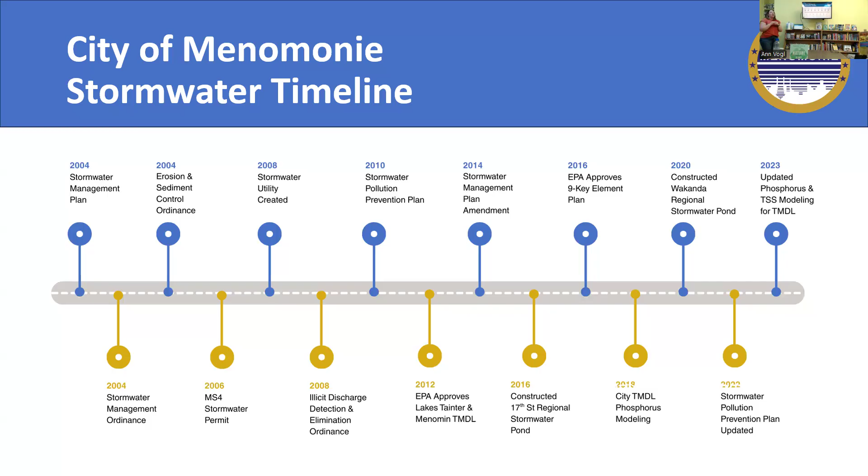Residents pay based on a flat rate, which right now is $12.50 per quarter per household. Businesses and industrial uses, schools, etc., pay a rate based on the amount of impervious area—the area of hard surfaces, like their building footprint, parking lots, etc. They pay a rate based on the amount of impervious surface they have.

So I'm going to whip through some of these minimum control measures and the things we do to fulfill those measures and track. Education is a big one—there are a number of different topics we have to educate on. So we do things like this tonight, and a lot with the school district and different kids and field days, kinds of things.

One of the things we also do is collaborate with other municipalities who have the same permit. So Rain to Rivers is a group of MS4 permitted communities in western Wisconsin all working together to do education and outreach for stormwater. We pay dues as a member municipality, meet monthly, and do larger education projects—like signage at different ball fields, radio ads, TV ads—things each individual municipality would have a hard time funding or having the resources to do.

We also put on workshops and are at community events and things like that. We also have a mini grant program—if you work for a government or a nonprofit, we do $1,000 mini grants to do rain gardens or different stormwater water quality projects. That's something we like to fund, and we love to see the different projects that groups come up with. It's also just a great peer network for idea sharing—hey, I got this problem, how do you handle this? Just trying to not reinvent the wheel.

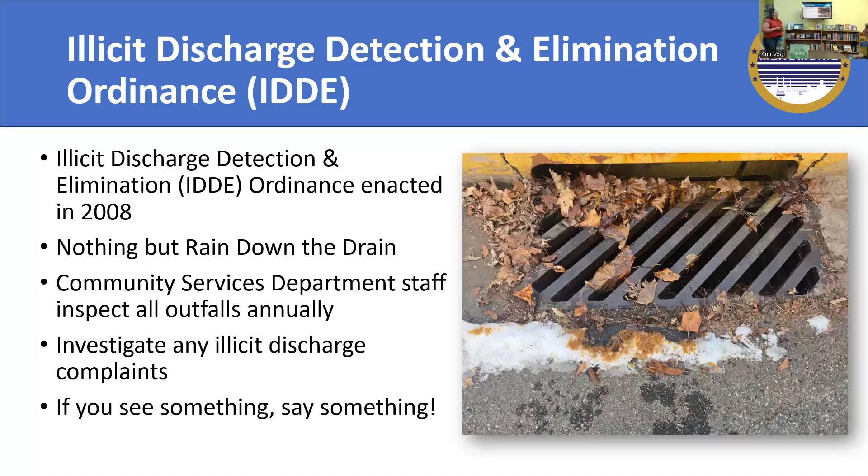They go there at least 48 hours after a precipitation event, because we want to make sure it's dry, that nothing should be running, and then we take pictures.

In addition to the IDDE screening, we're looking for maintenance concerns as well, if there's erosion, if the pipe is starting to erode, if the pipe has fallen off. We have some where the end of the pipe has fallen down or things like that. So we look at maintenance concerns every year just to make sure everything is going okay.

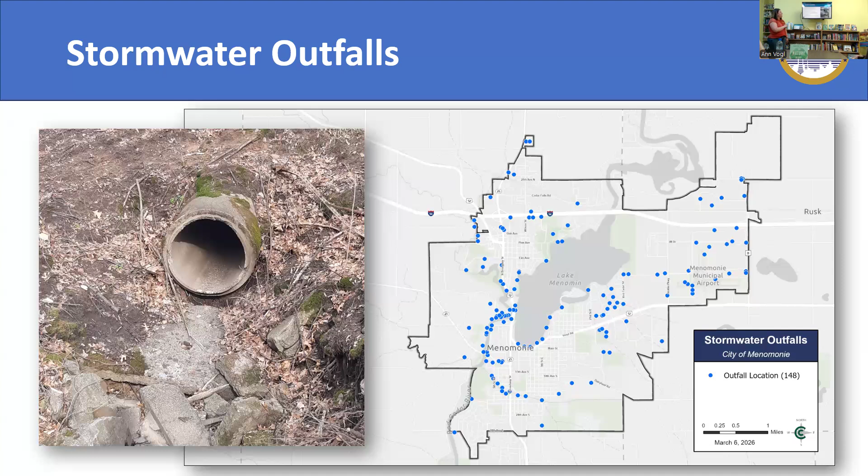This is a time-consuming thing to go to 148 places, and they are not necessarily in the most accessible spots. It's down lots of hills and steep banks and things like that, and it almost always happens in late fall, after it's too cold to do road work, so it sometimes is a little bit dicey for our street staff.

But I think it really highlights that water quality work isn't just me in the city. It's our street department, our building inspection department, our city engineers. It's a real collaborative effort to get all this work done, and we're really willing to help each other out to get it done.

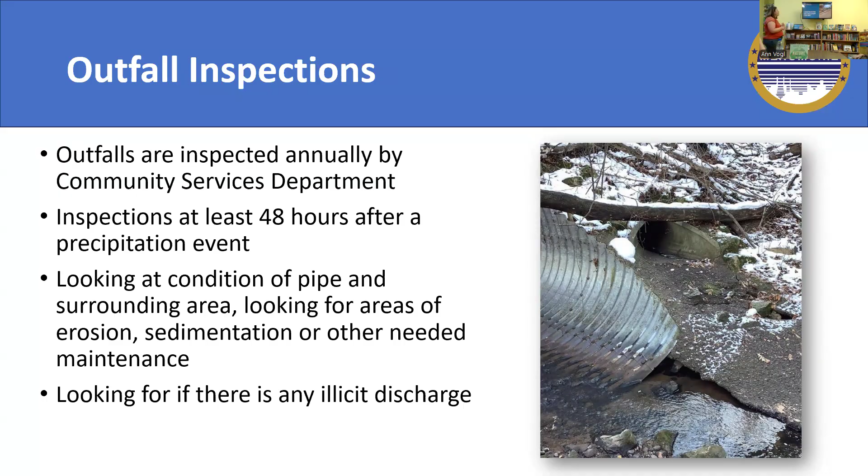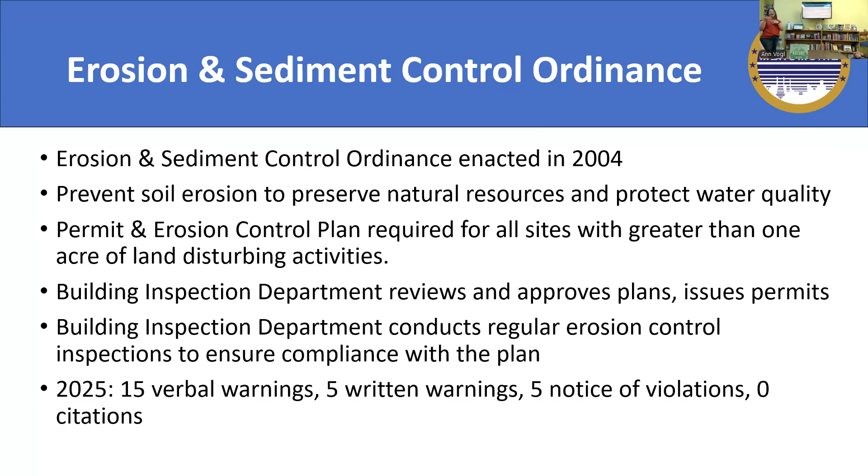Construction site pollutant control is another thing other people help me do. Our building inspector handles this part of the program. We have an ordinance from 2004 that focuses on construction sites and the measures they have to take to make sure soil and water stay on their site during that process. They have to give us plans for how they're going to do that, and then we can enforce those plans. So here are a couple of examples.

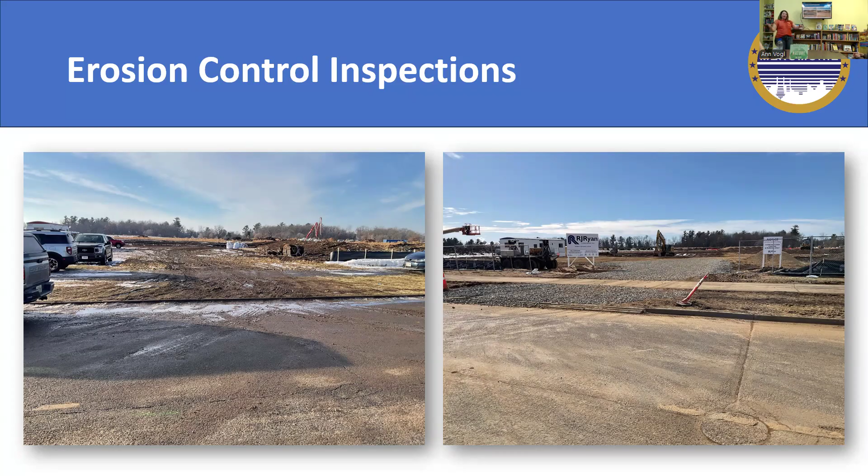What we do want—so we gave them a warning and a violation—and on the right, they put in tracking rocks. These are basically big rocks so that as trucks drive over them, the mud and dirt flops off into the rocks instead of onto our streets.

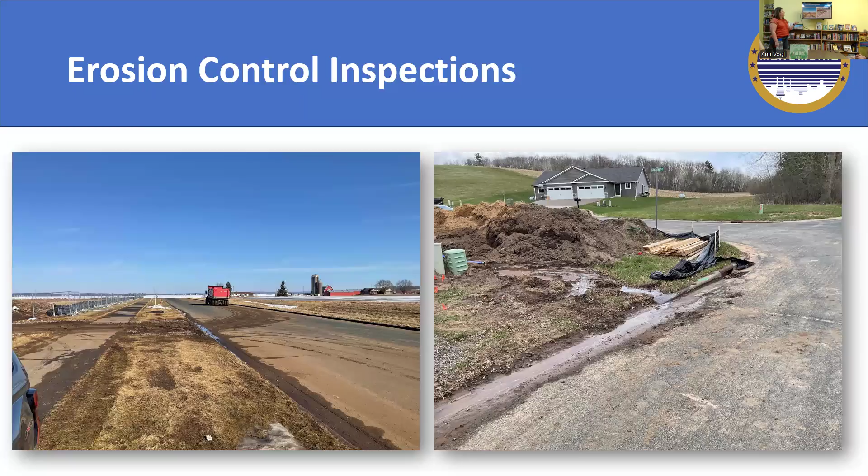Post-construction stormwater management covers our stormwater ponds, swales, and things of that nature. This applies when construction is going to happen in the city—developers have to give us a plan that tells us a lot of different things.

It tells us how water flows on the site before they do anything, and how water will flow after they build. It shows how they'll reduce stormwater runoff, both sediment and phosphorus, to meet our city ordinances and state statutes, and what the design of the practice will be—whether it's a dry pond, a wet pond, or a swale.

They have to sign a maintenance and monitoring agreement, which is basically saying in perpetuity they have to maintain the function of these stormwater ponds for every owner till the end of time. So that's recorded with the Register of Deeds.

Some of the common stormwater practices that we see are wet ponds. That's a pond that is going to hold water all the time, and it focuses on getting sediment and things to settle out. Infiltration basins are a dry pond, so there's no water in them unless it has rained, and then it's letting that water slowly infiltrate into the soil.

Rain gardens and bioinfiltration basins are the ones that have flowers inside of them, and then vegetated swales are just kind of the dips in the grass that are typically still mowed with turf grass. They're just kind of providing the conduit to get water to a certain place.

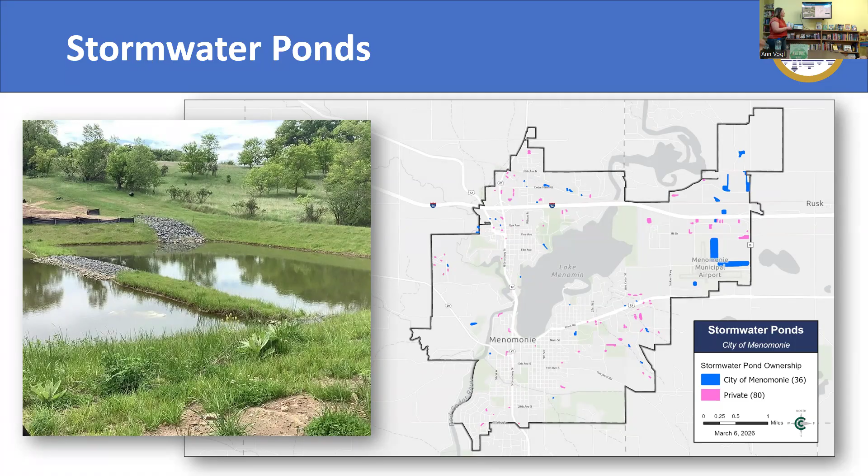So pond inspections for our 36 publicly owned ponds, those have to be inspected annually. I go out and do those in conjunction with our streets foreman, because the streets department is the one who would be doing any maintenance on it. So we do that together.

And then privately owned ponds, I inspect at least once every 5 years. My goal is to do every 3, but for sure once in our permit term. I do privately owned ponds, and then if there's maintenance that needs to be there, I'm working with that property owner to get that work done.

Things that we're looking at there, we're looking at the condition of the structures, so the inlet pipe, the outlet pipe, access to the pond, can you get to the pond if you needed to do maintenance. If there's any erosion, if there's any woody vegetation, so you don't really want trees or shrubs or things of that nature on the slopes of the pond.

Those need to get taken out. If there's trash that's there, if there's sediment there that's kind of starting to prevent water from flowing in, they would have to kind of dredge that out, etc. So those are the things that we look at during pond inspections.

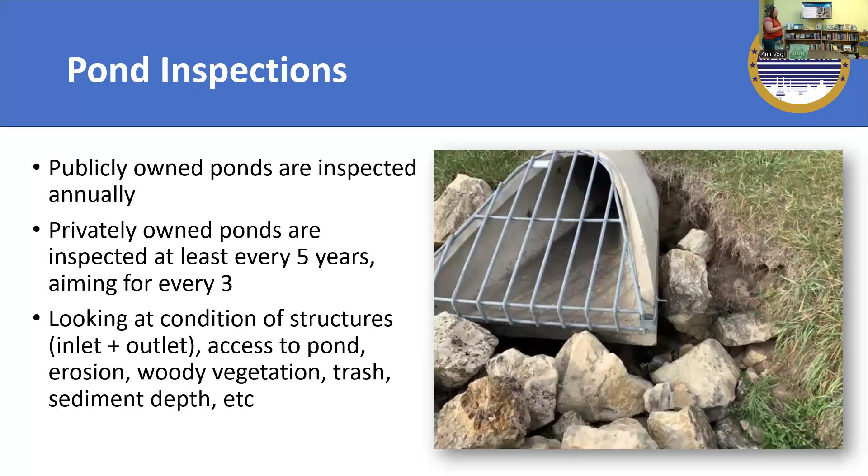This one is the Wakanda Regional Pond, which is up in Wakanda Park on Beach Road. We cut a pipe that was already existing in North Menomonie, and then it goes into a wet pond, and then through here, there's a series of cells that kind of step their way all the way down to the lake.

It has lots of native plants in it, so this is kind of an example of that bioinfiltration basin. And those weirs then in the rock kind of allow it to flow over and go in through there.

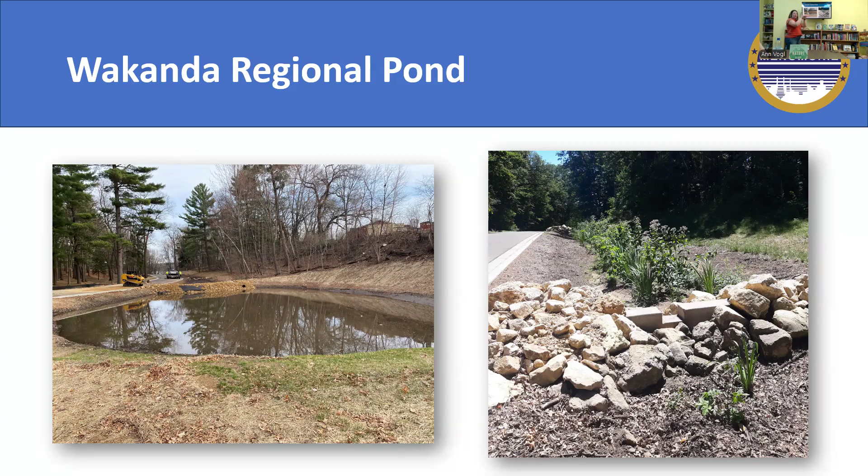So pollution prevention is kind of the catch-all minimum control measure. Things that fall under there are street sweeping. So we have a couple of street sweepers. One is mechanical, so it really is just like it sounds, it's like a broom in your kitchen, but a lot fancier for that. And then there's a vacuum one that has some suction that helps get some of that sand up. Different scenarios work better for different sweepers there.

We typically street sweep between March and November. We do a big push as soon as the snow is kind of done. As of this week, we have at least hit every city street once this spring. So we'll continue doing street sweeping, kind of trying to head back and hit harder hit areas. And we will eventually street sweep all of the trap rock that is out on Broadway. They're starting to spray patch and things like that.

We use street sweeping for sediment, dirt, sand, and more. We collect and pile all of these street sweepings, and then we test them after a certain volume. That's because we have a permit for beneficial reuse from the DNR, called a low hazard exemption, meaning that instead of having to landfill all of this material, we test every 200 yards or so, I'm not 100% certain, and then based on those tests, we screen it.

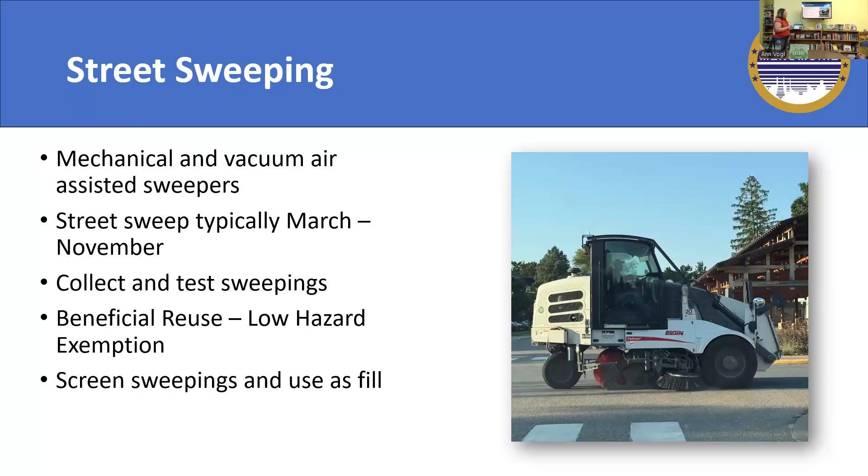Any pop bottles, litter, or things like that get screened out and have to go to the landfill. But then we can use that material for fill in certain spots based on our test results. So that's a huge money saver, being able to have that permit. It's a 5-year permit, and we just sent in to have it re-upped for another 5 years, so we should hopefully know soon if that happens.

Then we do leaf collection, which we are currently in the process of doing in the spring and the fall. We do a couple of days each season where we'll pick yard waste and brush up at the curb. Leaves are a significant source of phosphorus pollution, especially in the fall.

We compost the yard waste that we get at the solid waste site, and once that finished compost is ready, we give it away for free. There's a very large pile at the solid waste site, so if you're in need of compost for your garden, feel free to come and grab that.

And then we follow this up with street sweeping just to make sure we're catching as much of those leaves in that process.

In the last couple of years, we've done some native plants at City Hall. I begged for areas and got one little stretch on the south side and the area by the dumpster enclosure and the electrical things that wasn't really being mowed well anyway. So I was like, hey, I'll take that. Beggars can't be choosers, so it's the prettiest dumpster enclosure area you've ever seen.

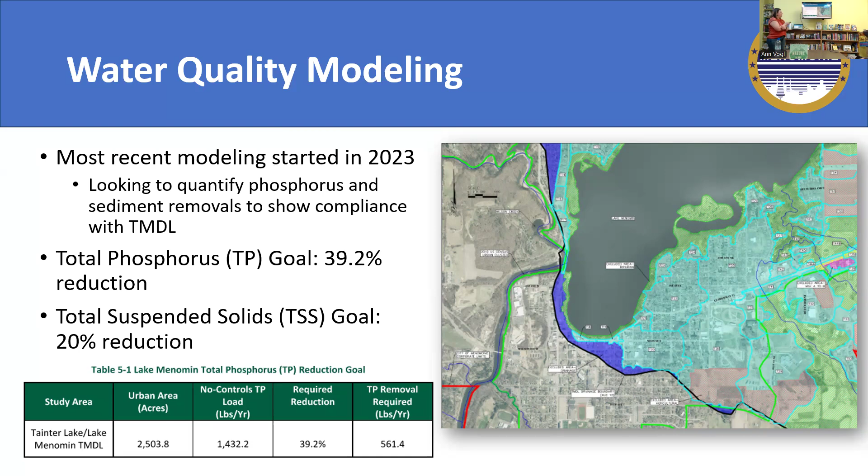In this modeling, we came out at a 50.5% reduction for sediment, or TSS, and a 45.5% reduction for phosphorus, which shows we are in compliance with our permit. We are working with the DNR to get formal concurrence with this. The thing to note here is this model did not include any of our privately owned stormwater ponds - all of those 80 stormwater ponds you saw on the map earlier aren't included in this model.

Street sweeping isn't included in this model. Leaf pickup isn't included in this model. It's a very bare bones model, and we're still meeting our goals for that fairly handily.

So we're waiting now to get concurrence from the DNR and then hoping to be able to move on, because the TMDL is not the entire city. It is only the parts of the city that drain into Lake Menomin. So if you are in parts of the city that would drain into Wilson Creek or below the dam, like the Red Cedar River, those are not considered in the TMDL.

So if I want to do a stormwater practice outside of that, I really want to make sure that we are compliant with the TMDL, that the DNR agrees with that, before we spend money doing additional ponds in other places.

Kind of the next two ponds that are on the list for when that happens are down at our community services area off of Highway 29, and then up in North Menomonie off of like 28th Avenue as you're heading out north on 25 out of town.

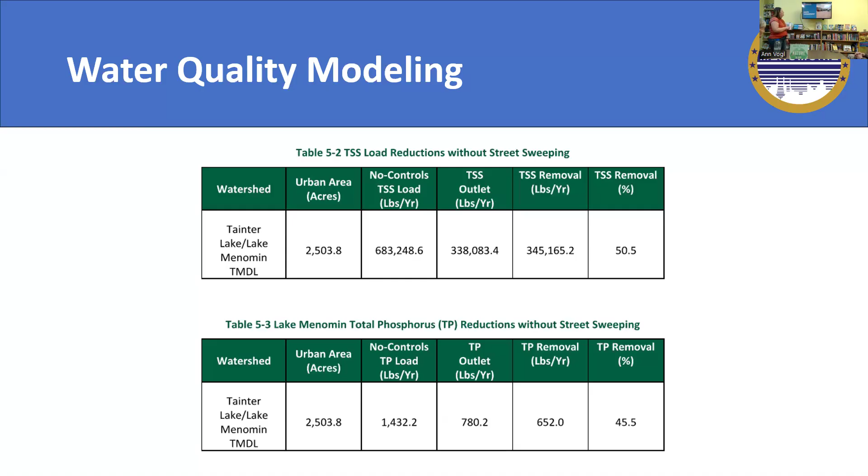So now switching gears away from water and stormwater to waste management. The city has a drop-off site for solid waste and recycling. It's open 3 days a week for city residents, and we take a lot of things at the site. We have what I would consider your regular household trash and recycling, so paper, cardboard, glass, aluminum cans, steel cans, all of that. We also take scrap metal, so basically anything metal we can take.

Used oil and oil filters, furniture and bulky items - there is a charge for that. Carpeting, which also has a charge. Limited amounts of construction waste, like a pickup load or less. No shingles. And then we also take yard waste and brush. We have that free compost and wood chips as well out there.

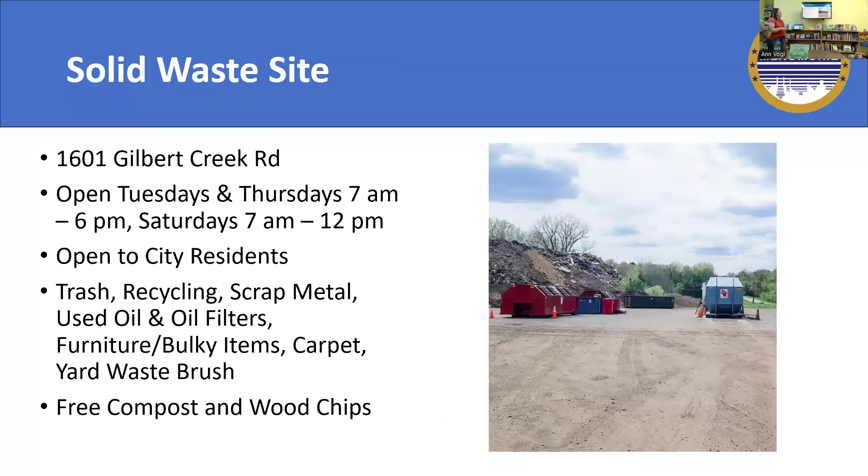We also have curbside recycling. The city pays for curbside recycling for 1 to 4 unit residences, so that's one of the other things you'll see on your quarterly utility bill if you live in the city. We have 2 current haulers for curbside recycling: GFL, which is the old Menomonie disposal, and WM, which is the old advanced disposal. They like to buy each other.

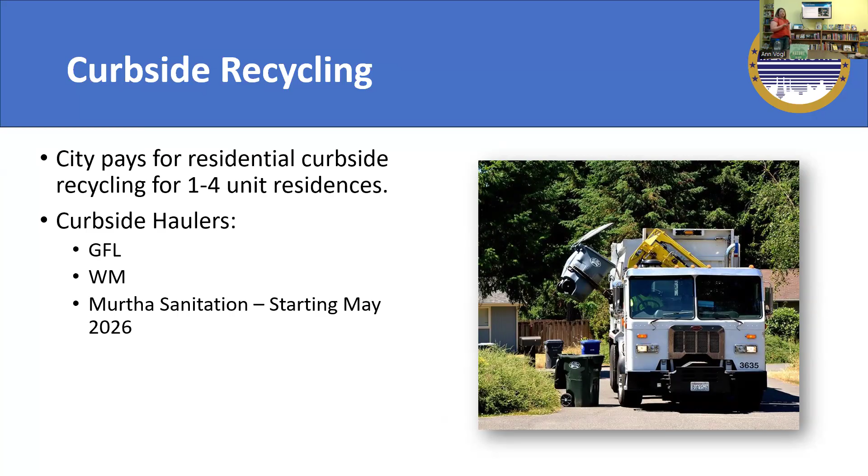And then we also have a new one coming to town, which is really exciting. Murtha Sanitation out of Baldwin is expanding their operations into the city in May. So that's another option for both residential and commercial solid waste recycling in the city.

Urban forestry has been a big focus of the last several years, mostly because of the emerald ash borer and the large amount of ash trees that we had in our city boulevards and our parks, and just in general in private property as well.

It was a very popular tree to plant, particularly after the Dutch elm disease epidemic. They're like, oh, ash is a really great tree that's kind of like an elm, and we planted a lot of them, which didn't work out so well for us.

So we removed in the last probably 5 years over 1,000 ash trees just out of city boulevards and the main areas of parks. The kind of more wild, natural, wooded areas, we have not done any maintenance in there. We're kind of letting nature do its thing there.

But for urban forestry, we do have a city forester position. That's a position within our city streets department. He probably spends about half of his time on forestry related duties and half on streets maintenance, plowing snow, that kind of thing. That may change a little bit as we move away from cutting trees all winter long.

And then we have an urban forestry board, which Liz is the chair of, and Monica is on it as well. So we have that. We meet 11 times a year and work on different policies, procedures, different events, things like that.

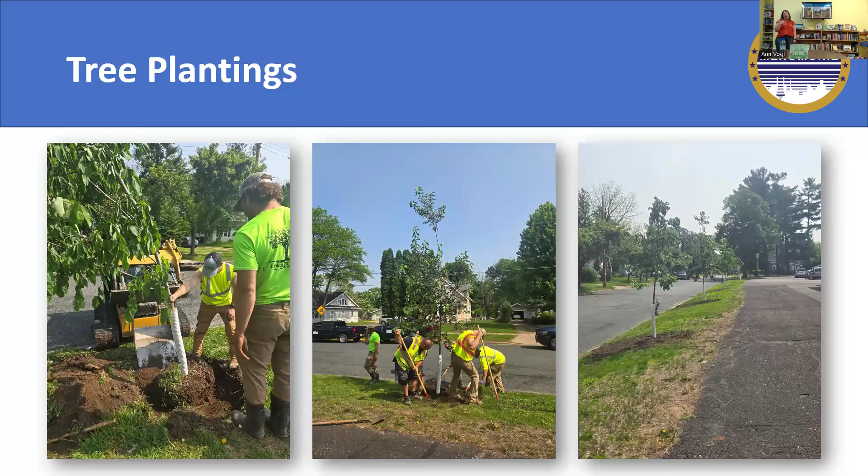So we've done a couple of restoration projects in the city. This is the Galloway Creek Restoration Project on a parcel of land that the city owns over by the high school. It's a couple acre parcel partnered with the Lower Chippewa Invasive Partnerships, working to remove tons of invasive buckthorn, a couple of cork trees, and some honeysuckle. That's some of the work here.

And then a current project that we have with our Urban Forestry Board is kind of a test project in Phelan Park. So at the very south end of the park, there is a tributary of Galloway Creek that is kind of the headwaters of Galloway Creek there, very infested with buckthorn and honeysuckle.

And with Dr. Keith Gilland and his UW Stout students, who just took some chainsaw safety classes, got to practice their skills and removed a ton of invasives over the winter, which looks really awesome. And then the fire department was kind enough to burn it for us. And then I just picked up 300 saplings today that we are going to plant there with different volunteers and groups to try to restore that back to more native trees.

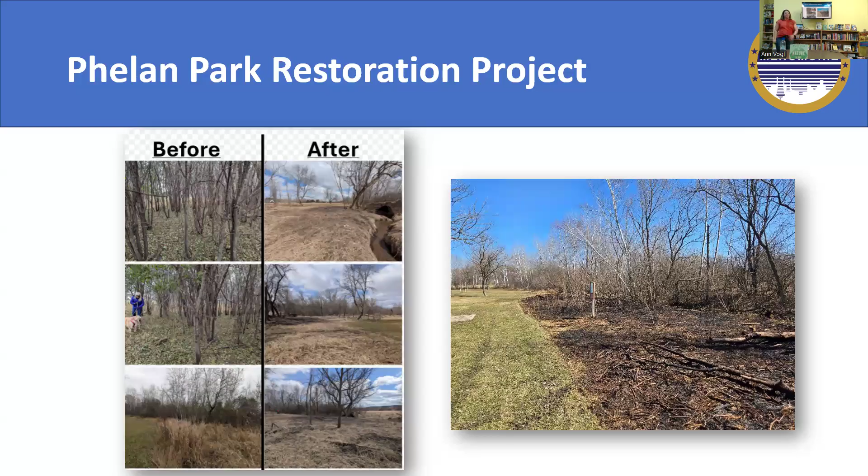So the city has also done a lot in the energy world. In 2020, the city council passed a resolution for the municipal operations and buildings to be carbon-free electricity by 2050. It also established some incremental goals for our carbon reduction, that we would reduce 25% of our carbon footprint by 2030, 60% by 2040, and then be fully carbon neutral by 2050.

So with that resolution and that goal, we knew we needed some help in how do we get there, developing a plan, etc. So we partnered with Xcel Energy and their Partners in Energy program. We were actually the first municipality in Wisconsin to do this program. It was a 2-year program where we formed an energy action team, which was city staff, business leaders, residents, representatives from the school district and Stout, and we met together.

We talked about our goals for Menomonie, our priorities for energy, etc., and that developed an energy action plan. That plan outlined both near, mid, and long-term things to do to kind of enhance energy efficiency, but also renewable energy in the city.

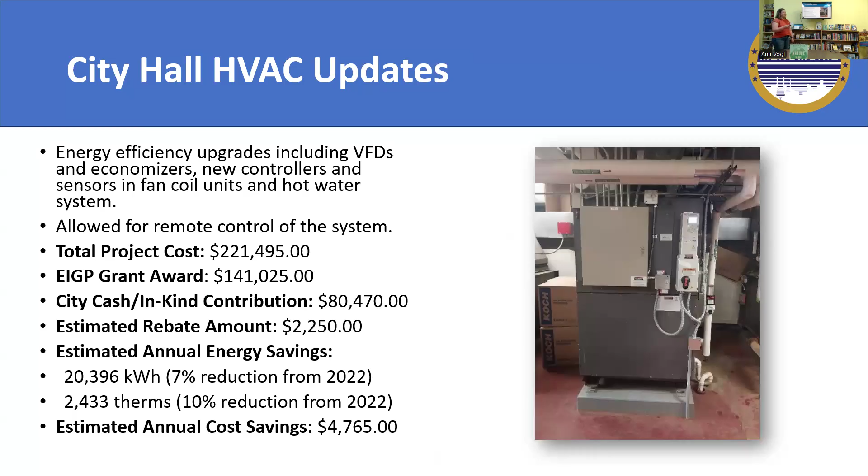And certainly the comfort of working in the building has added some intangible benefits. I spent a summer where my office was 62 degrees and I wore more clothes to work than I did in the middle of winter. My office is now comfortably about 71 degrees in the summer. So those things are very intangible benefits that won't show in a spreadsheet, but it helps with tenants and being able to retain them as well.

LED streetlight conversions - if you've driven around town at night in the last couple of years, we've worked to convert not only the downtown decorative bulbs to LEDs, but the tall overhead lights as well. This is a grant we got from the Wisconsin DOT called a carbon reduction grant, which was part of the bipartisan infrastructure law.

Between the grant and the focus on energy rebates, we actually expended $0 in cash to do this project, and we're estimating to save about $25,000 a year in lighting costs. So this was a no-brainer to do, and at the end of the day you have no cash expended. It did take a lot of labor hours for our poor electrician in the bucket truck - he was up and down a lot of times for a couple of months to get that done.

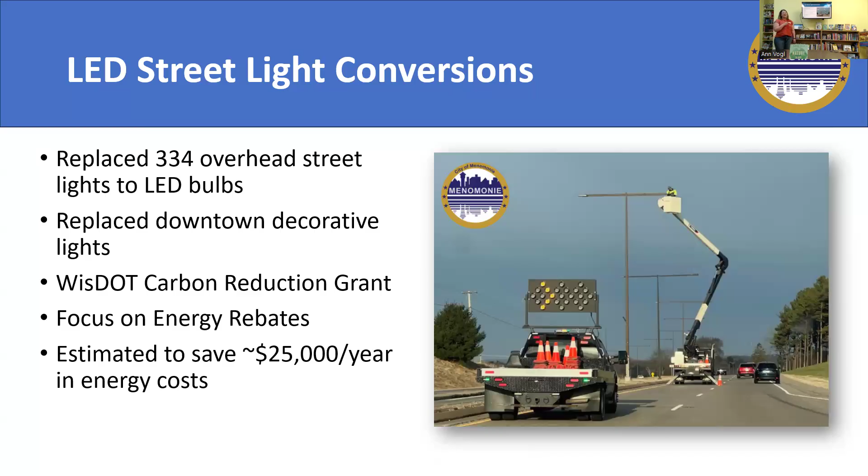So now, things you can do to help with water quality, the environment, and sustainability. Cleaning up after pets is a big one. Pet waste is gross - it's got bacteria, viruses, parasites, all the things. And when it rains, that makes a really gross soup that goes down those storm drains and into our lakes, helping promote algal blooms and different nutrient loadings. Don't toss your pet waste down the storm drain - put it in the trash or flush it down the toilet.

If you're on the walking trails, there are a fair number of green stations that have little doggy bags and a little trash bin that we empty for you. So we're trying to make it convenient for everyone to pick up after their pets.

Reducing salt use - we talked about the chloride study we were doing earlier. The best way to reduce salt use is to mechanically get rid of your snow: shovel it, snow blow it, get out there early, don't let it accumulate. If you do use salt, you want to make sure there's 3 inches between salt grains - that's a lot of space between salt. Anything more than that is not actually more effective; you're just wasting your money and polluting our waterways.

Does it help if you use pet-friendly salt? It's still salt - salt is salt. It still adds to the chloride. So it's still a chloride-based product, it's just less toxic or less irritating to pets' feet.